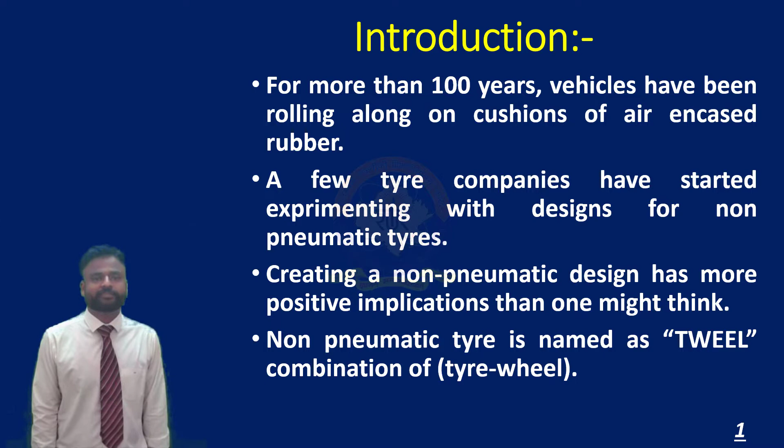Let's move to the next slide. Our third slide is about what a tire is. A tire is a ring-shaped vehicle component that covers the wheel's rim to protect it and enable better vehicle performance. Most tires, such as those for automobiles and bicycles, provide traction between the vehicle and the road, while providing a flexible cushion that absorbs shock. The material of modern pneumatic tires includes synthetic rubber, natural rubber, fabric and wire, along with carbon black and other chemical compounds.

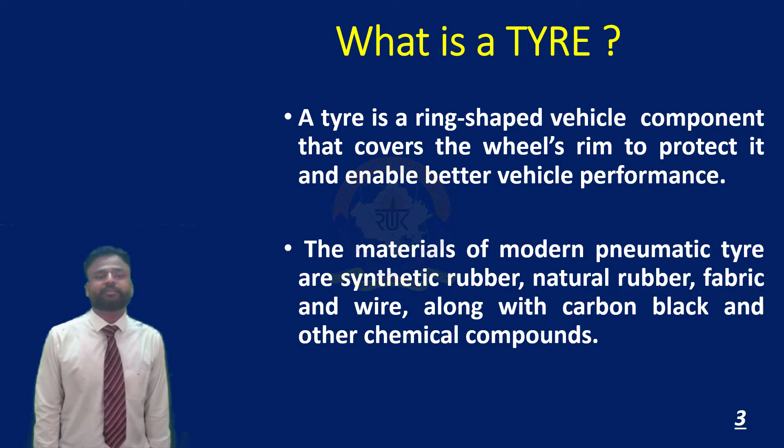This slide is a continuation of the previous slide. The tire consists of a tread and a body. The tread provides traction while the body provides containment for a quantity of compressed air. A tire is used to transmit driving and braking forces to the road, and also to provide power to smooth steering.

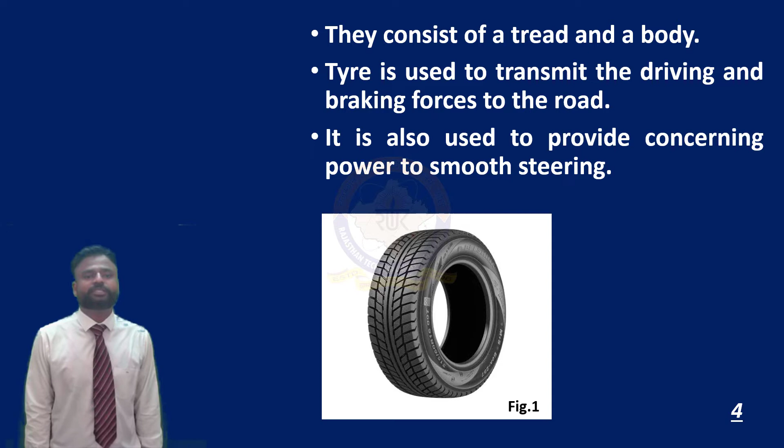Let's move to the next slide. Now, why compressed air in a pneumatic tire? A pneumatic tire consists of an air-tight inner core that is filled with compressed air. The compressed air inside the tire maximizes the tire's load carrying capacity, absorbs shock, and provides resistance against cutting and abrasion. The compressed air pressure in the tire is greater than the atmospheric pressure outside, so the tire remains inflated even under the weight of the vehicle. It is actually the tire's air pressure that protects it from deformation and general wear and tear, and gives the tire its cushioning effect.

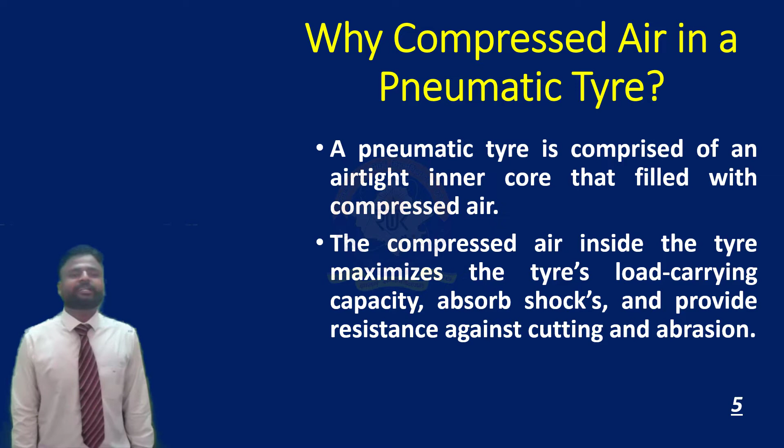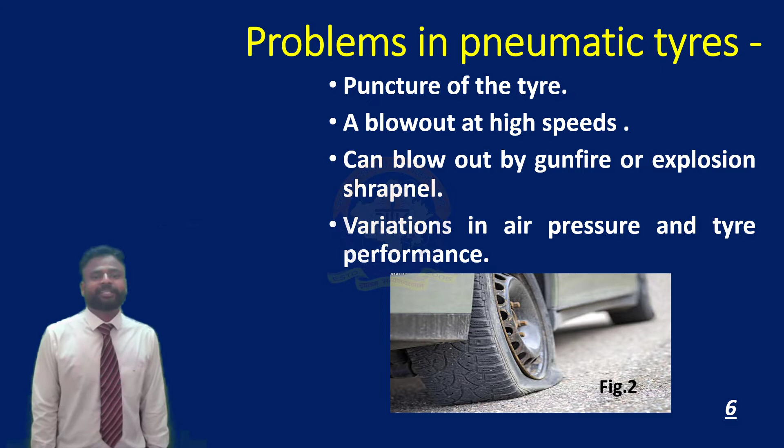Let's move to the next slide. This slide is about the problems in pneumatic tires. The first problem is puncture of the tire. The second is blowout at high speeds. The third is that it can blow out by gunfire or explosive shrapnel. There is also variation in air pressure affecting tire performance.

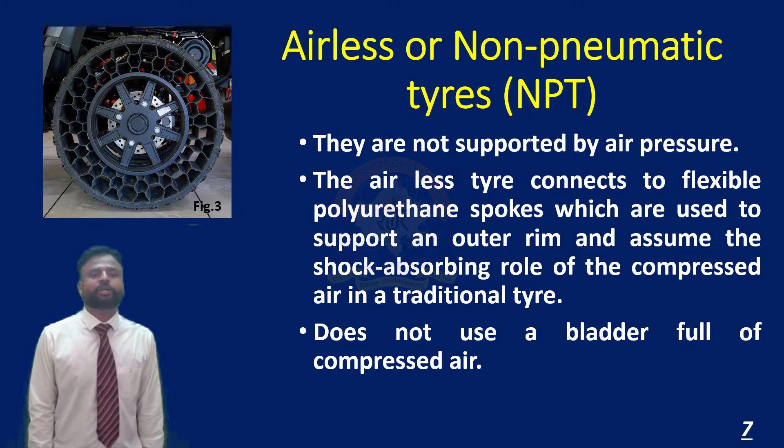Moving forward, let's talk about non-pneumatic tires, or airless tires. Airless or non-pneumatic tires are not supported by air pressure. The airless tire's hub connects to flexible polyurethane spokes, which support an outer rim and assume the shock absorbing role of the compressed air in a traditional tire. It does not use a bladder full of compressed air, and therefore it cannot burst nor become flat.

Let's move to the next slide. Now talking about the parts of non-pneumatic tires. The main parts are: first, the tread, which is a rubber layer that wraps around the circumference and touches the pavement. Second, shear bands that surround the spoke. Third, the deformable wheel, which lies between the spokes and hub, and deforms together with the flexible spokes during road impacts; it is also called the energy wheel.

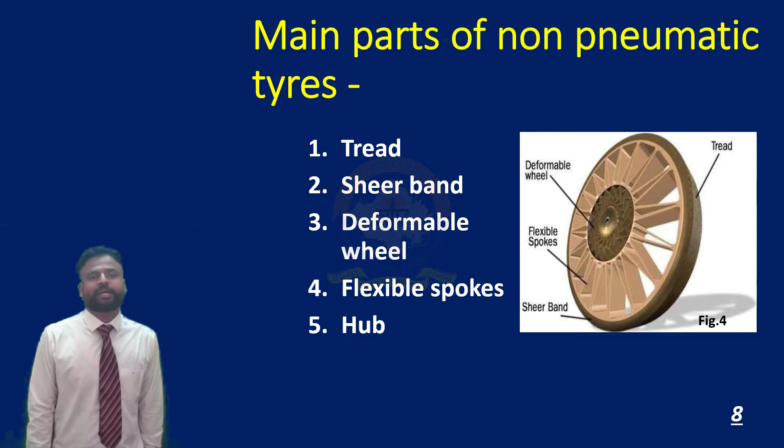The fourth part is flexible spokes, made up of polyurethane material, which are flexible and help absorb road impacts. The fifth part is the hub, which is a rigid attachment that is bolted to the axle. Let's move to the next slide.

Now let's discuss the working principle of the non-pneumatic tires.

The tire is a single unit, an assembly of 4 pieces bonded together: the hub, the polyurethane spoke section, a shear band surrounding the spokes, and the tread band. The shear band surrounding the spokes effectively takes the place of air pressure in distributing the load. The tread is similar in appearance to a conventional tire.

When the tire is put to the road, the spokes absorb road impact the same way air pressure does in a pneumatic tire. It works well over rocky terrain, so it should work well for 4-wheel vehicles too. The tension of the shear band on the spokes and the strength of the spokes themselves replaces the air pressure of a traditional tire.

The tread is then attached to the shear band. The tread and shear band deform temporarily as the spokes bend, then quickly spring back into shape.

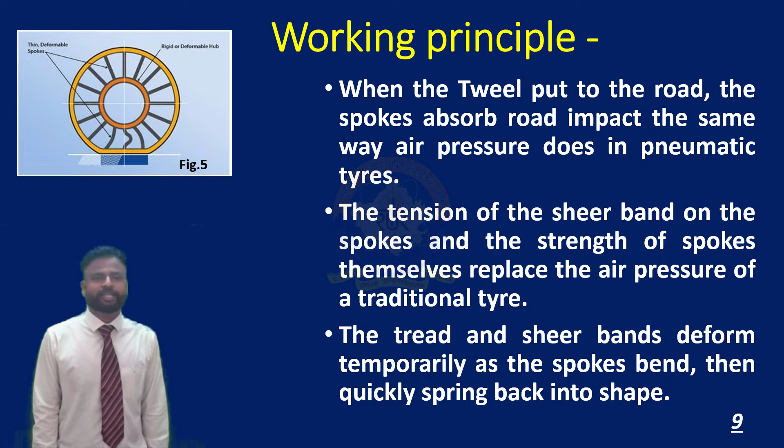Let's move to the next slide. Let's discuss the application of non-pneumatic tires. There are a number of vehicles using NPT. Some examples are: the first one is earth movers.

Let me talk about earth movers. The non-pneumatic tires give high stability to earth movers to climb all terrains. It provides a much smoother ride than a pneumatic tire due to its excellent shock absorption. Even if the vehicle is heavy, it will not damage the running surface. NPT are very resistant to cuts compared to traditional tires, so they last longer.

The second application is wheelchairs. Non-pneumatic tires are used in motor-powered wheelchairs which can climb stairs. It was first introduced by a company called Michelin, so that the suspension system in the wheelchairs can be eliminated.

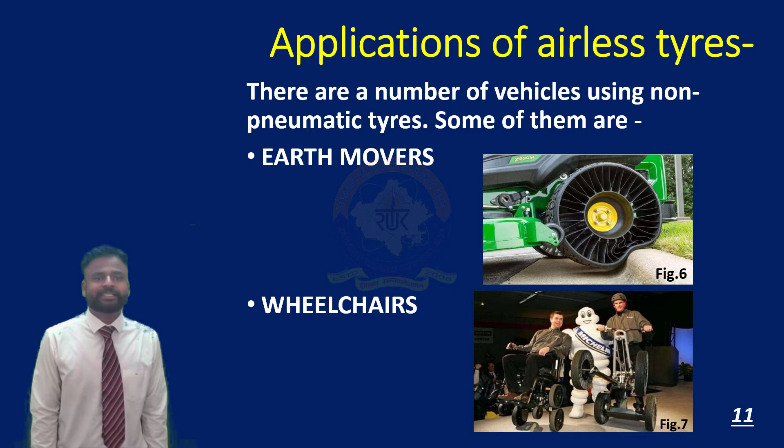Let's move to the next slide, talking about the advantages of non-pneumatic tires. The advantages are: it eliminates air leaks or tire blowouts, gives durability and long life, and no maintenance is needed. Fourth, it remains mobile even with some spokes damaged or missing. Another advantage is vehicles remain under control even during emergency braking, and it has less environmental impact and facilitates recycling.

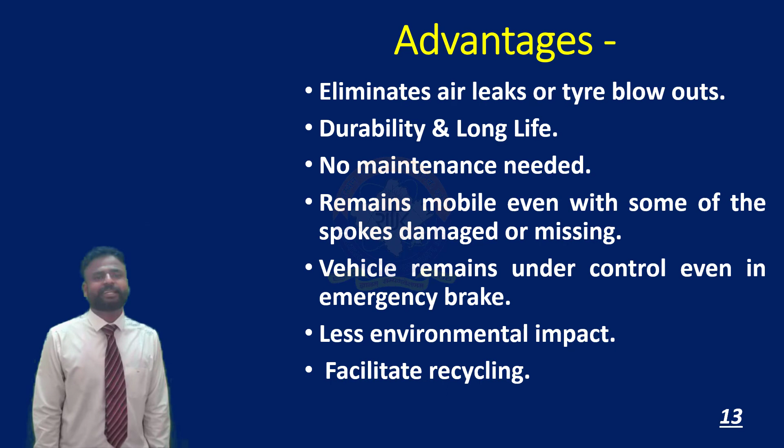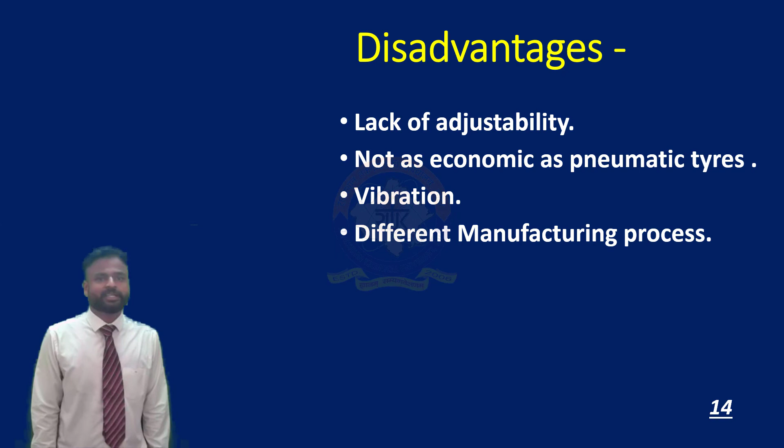Let's move to the next slide, talking about the disadvantages of the airless or non-pneumatic tires. The first disadvantage is lack of adjustability. The second is it's not as economic as pneumatic tires. Third, vibration in non-pneumatic tires is very large compared to pneumatic tires. And different manufacturing processes are required for making non-pneumatic tires.

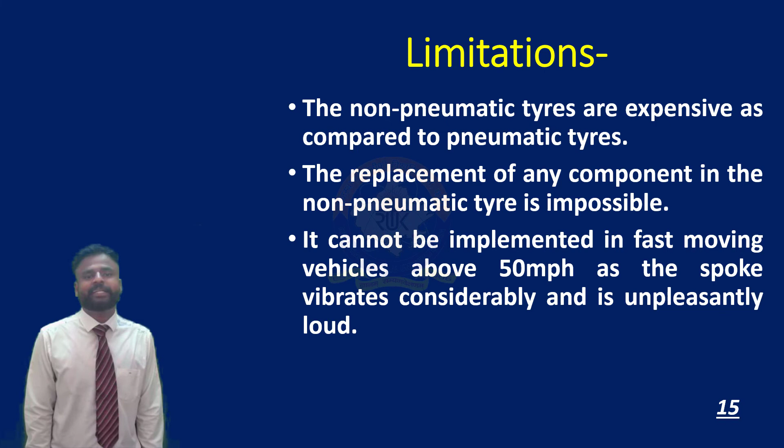Let's move to the next slide. Let's talk about the limitations of non-pneumatic tires. They are expensive compared to pneumatic tires. Replacement of any components in the non-pneumatic tire is impossible. It cannot be implemented in fast-moving vehicles above 50 mph, as the spokes vibrate considerably and it becomes unpleasantly loud.

If someone has some queries, then they may ask.

How do non-pneumatic tires last? The answer is the airless tire is rumored to last about 3 times as long as conventional tires.

Will airless tires eventually take the place of radial tires? The answer is no. All forms of airless tires have too many problems when spinning at higher speed, typically causing a huge amount of vibration and additional stress to the hub and suspension components.